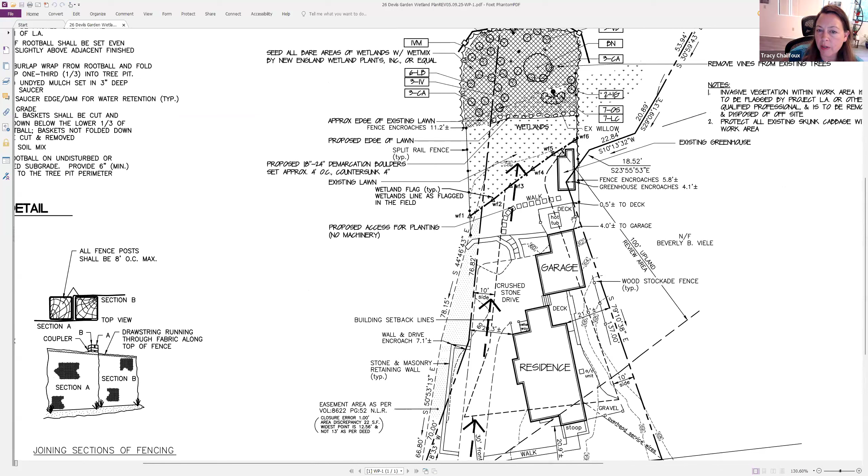Good evening. It is 6:02 on May the 13th, 2025. This is a meeting of the Norwalk Conservation Commission and Inland Wetland Agency.

Could we have a roll call, please, Alexis? You are muted. Mr. Bennett. Here. Mr. Clack. Here. Ms. Brown. Here. Ms. Breslin. Here. Ms. Knight. Here. All right, so you have five, you have a quorum.

Thank you. Is anyone logged in from the public to comment on anything that's not on our agenda tonight? I currently have no attendees. Lovely. Moving on to receipt and discussion. First up is

S25-654, 26 Devil's Garden. All right, so this is a corrective action application that is responsive to an enforcement order that you had issued earlier this year. Again, the activities include restoration of a disturbed wetland area and the after-the-fact construction of some structures within the upland review area of the wetland.

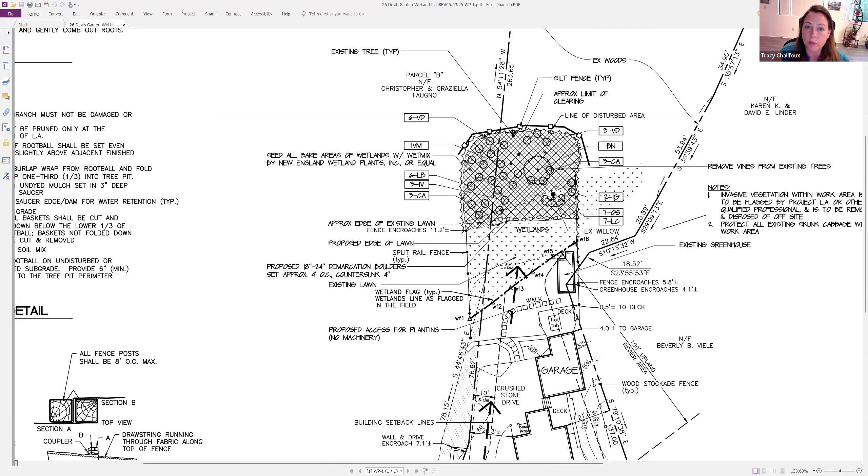And so at this point, I'd like to turn it over to Steve Danzer, who's present, to discuss what his recommendations are. Good evening to the commission. Steve Danzer, soil scientist, wetland scientist, office in Stamford. Actually, I'm going to hand this over to Tracy Chalifoux, landscape architect, because she did the brunt of the design, and I will pipe in if questions arise relating to wetland conditions existing and proposed. Tracy?

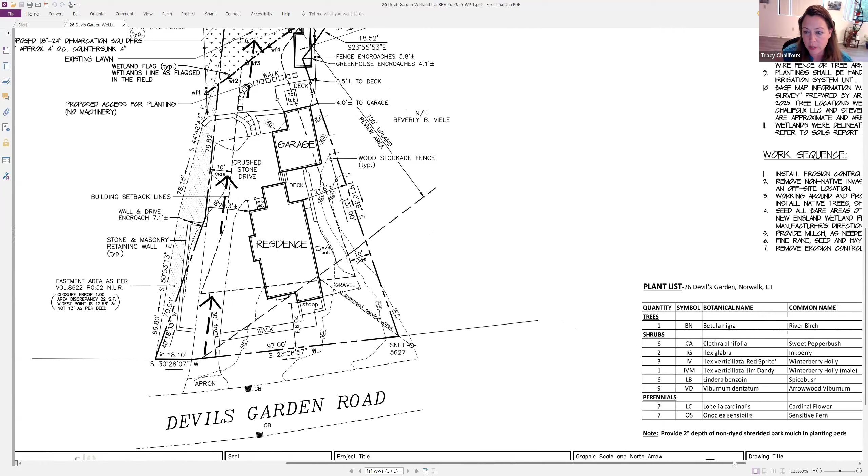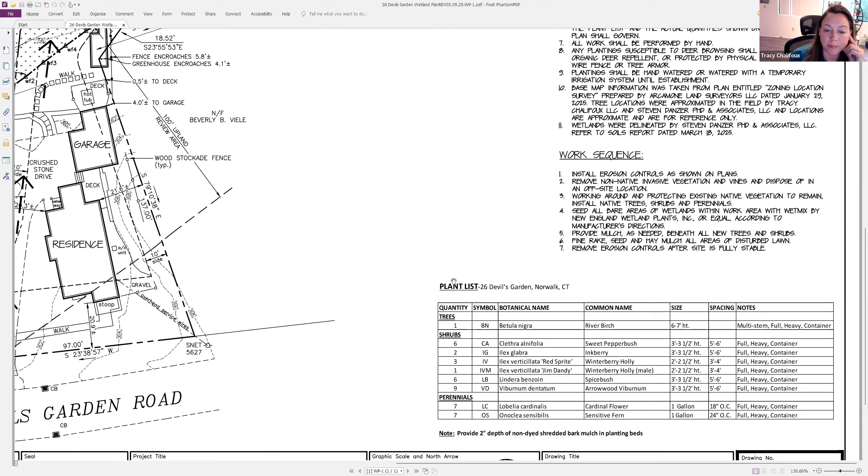Steve. I'm Tracy Chalifoux. I'm a landscape architect based in Danbury, Connecticut. And if I might share my screen with the commission, I'll do that now. Thank you. All right, is that visible to everyone? It is. Yes. Wonderful. It's maybe a little small, but I'll zoom in a bit here.

Okay, here we go. So just to orient everyone, here's Devil's Garden Road. Here is the residence. Behind the residence is an existing garage, and there's an existing shed here, and an existing deck with a hot tub sitting on a platform. I'm going to present the wetland restoration plan. This is to restore the area that was cleared, and some wood chips were spread within this area. The depth varies from about 0 to 6 inches, and that disturbance occurred generally about here, where you see this cross hatching. So it is quite a wet area.

So this planting plan incorporates native wetland plants that are tolerant of varying conditions from wet to some dry. There's an existing willow tree approximately here. So under the willow tree, given the shallow root system, we have some native perennials proposed there. And then some native shrubs indicated by these circles. So these are throughout, to restore the entire area. Any dots that you see are the approximate location of existing trees.

And we did observe some vines growing on those trees. So as part of this plan, we would remove or cut those vines as high as possible in the canopy and discard that from site. And any other invasive vegetation would also be pulled with the roots and discarded from the site.

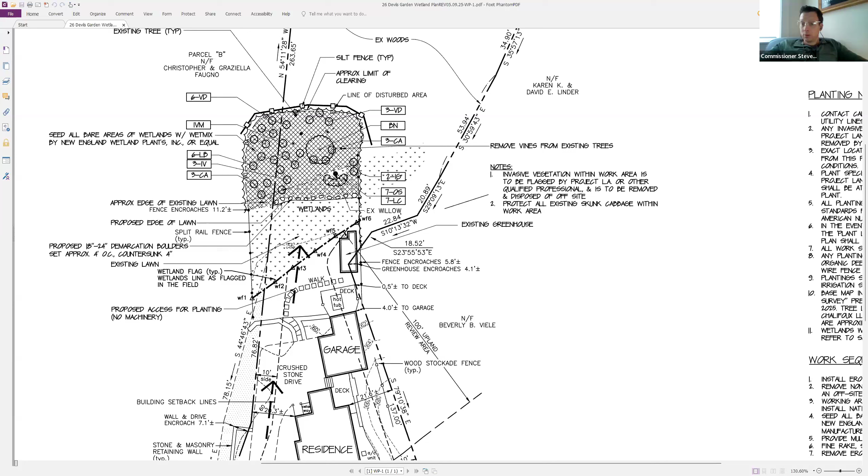Properties change hands all the time. And so, in terms of enforcement, it's about when things are noticed and they come before the commission. So to the extent that lawn was put in, it should have been permitted and it should have come before the commission. Right. Alexis, is there any precedent that we can refer to for a situation like this? And you're muted.

The activities that this is responsive to are the activities listed in the order, and so that order did not look at whenever the historic lawn area to the immediate rear of the house was established. Okay.

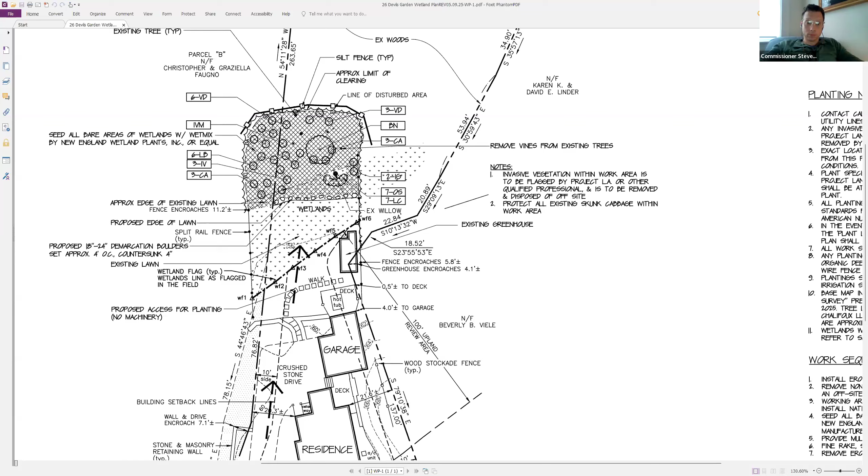I don't have the GIS open currently, but my recollection during the enforcement process was that there was a pretty clear demarcation of lawn going as far back as aerial photos could be interpreted. Oh, sorry.

Additionally, section 4 of the regulations does provide for continued maintenance. There are certain as of right activities spelled out in the Wetland Act, specifically for single family residences, that have to do with continued maintenance. You can't change the natural and indigenous character of the land, but if you have lawn, for example, that lawn can continue to be mowed.

But circling back to Ms. Knight's point, what you have here is a corrective action application, and the order clearly does require that the recently impacted wetland area be restored. So that is very clear. The disturbance of that wetland was done without a permit and is now being considered with this corrective action permit.

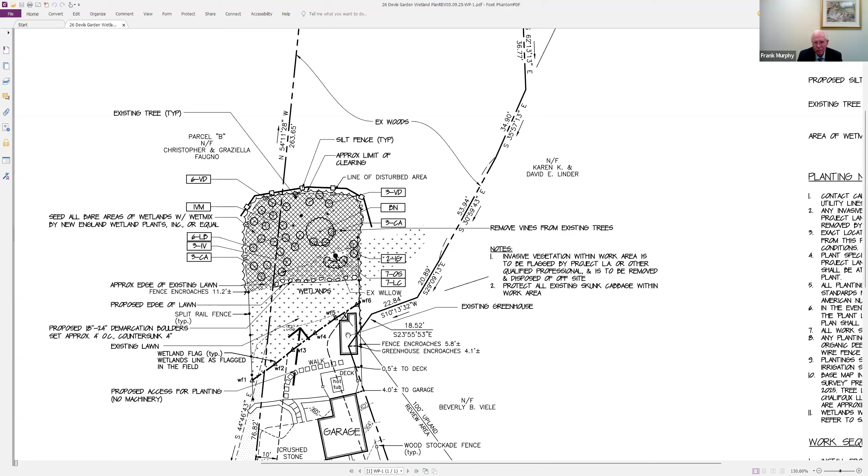So the piece of information I would want confirmed is, does that line of the approximate edge of existing lawn with the line of the boulders and small boulders, the line between the darker hatch and the lighter hatch, align with where we think, based on the aerial photographs, the line was and or should be kept or drawn?

Tracy. Thank you. I just wanted to state that Alexis was kind enough to share an aerial photograph with dimensions with us last week. Awesome. She had offsets from the existing structures, so the plan was revised so that this line coincides with those dimensions, which were the dimensions to the edge of existing lawn pulled from the satellite images before this disturbance occurred. Awesome. Thank you.

I'd also like to point out that there was a little bit of an encroachment back to here. If you can see this very lightly dashed line, we then pulled the restoration further to the east to give more wetland restoration per Alexis's direction. All right. Thank you for that clarification.

Okay, then to move this along, we haven't really talked about the structures within the upland review area.

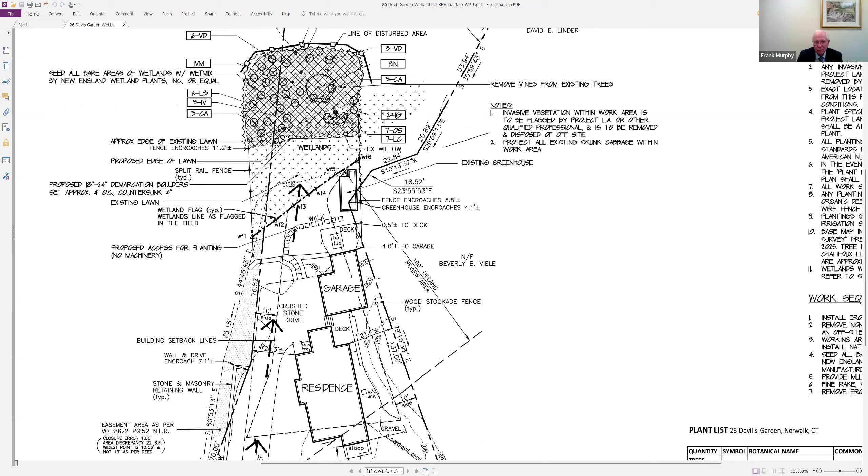And I'd like to remind the commission, as Alexis pointed out, your own regulations refer to residential uses in paragraph 4, and what it refers to is the state statute under which you operate that says in section 22a-40(a)(4), quote, uses incidental to the enjoyment and maintenance of residential property. It also says, quote, such incidental uses shall include maintenance of existing structures and landscaping, unquote.

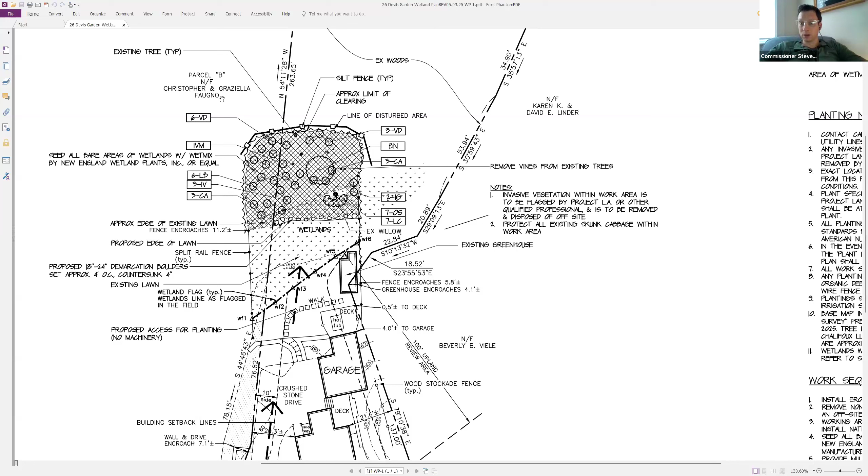So the intent of the legislature, and the legislative history bears this out, was that there were a couple of things the legislature was mindful of when they passed the statute in 1972, one of which was protecting pre-existing residential uses. So we are asking that we be able to keep the lawn because it's been there for so long, and it does absolutely no harm to the wetlands. Mr. Murphy, could you address the structure specifically? Yeah, I will. I just wanted to finish my thought on it. Oh, sorry. But this is on the outer fringe of the land trust wetland, which is 6 acres, and its potential impact is absolutely minimal.

Now, in terms of the shed, the shed is like a potting shed. There was a raised garden there, and the shed was added around it. One of the previous owners had planted grapevines there, and apparently they made their own wine in their basement. But the shed is very small in size. It's approximately 16 feet long and 10 feet wide, and in there is just an area for potting of plants and maintaining of it, and there's some tools stored in there. Once again, it really has no impact on the wetland at all, and we would ask that we be able to maintain the shed as it presently exists.

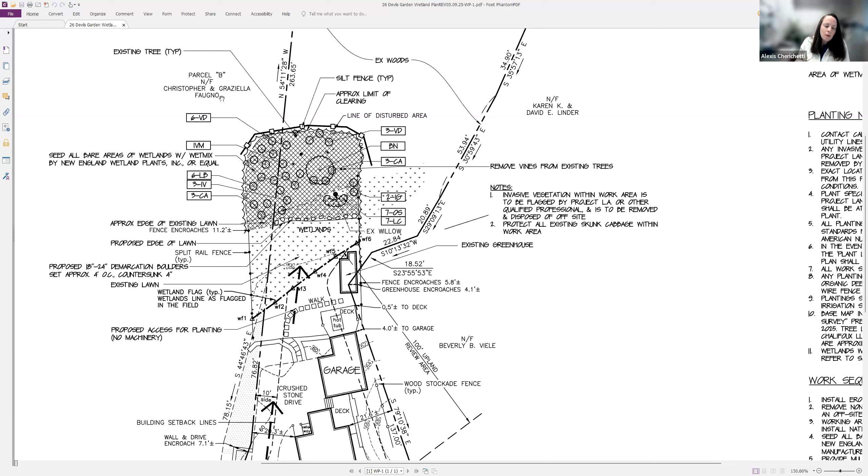Thank you. Any commissioners? I just want to get it out now so that it doesn't sneak up on us later if anybody has any hesitation. I don't. Yeah, it doesn't bother me. I do want to just note that both the deck and the shed are not zoning compliant. So they will need to comply with zoning regulations. It's not just the wetland regulations that need to be complied with. So just keep that in mind, though at the end of the day, the wetland agency may determine that those structures don't have an impact on the wetland.

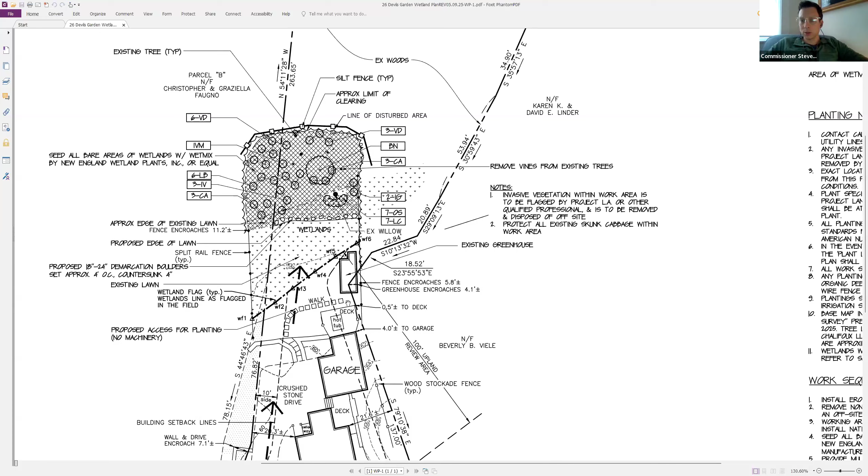Zoning is going to have to follow up, and would not be able to issue a zoning permit for those structures, either crossing the property line or within the zoning setbacks. Zoning setbacks with the new regulations have been reduced for most zones. So it's not a big setback, but I believe both of those are within that setback. Okay. And so if zoning requires you to move them, then you'd have to return to the wetland agency to modify the permit. And that's part of why I wanted to point that out, because I don't really want to have the applicant return to the wetland agency if zoning requires the relocation of those structures.

I'd like to comment on that very briefly. First, we have not reviewed this with zoning, and it's a question of which comes first. Now, if you say from a wetlands perspective it's not going to be approved, then there's no sense in us making an application if we need to go to the Zoning Board of Appeals. There is a slight encroachment on the abutting property to the east.

That abutting owner is well aware of it and has reviewed the wetland plan that we have proposed and has signed a consent to it. Similarly, on the western border, where there is an encroachment, where there will be planting, we have reviewed the plans with that property owner, who has, in part, the land to the west is subject to an easement that's been in existence since the original subdivision and is in the deeds to both the Shaak property and the Faugno property

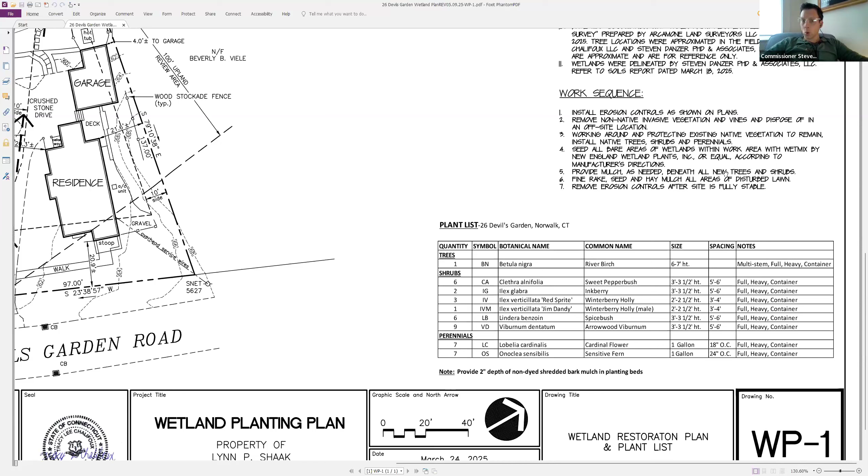to the west. In terms of the area where there's additional planting, so in the area of the Faugno property, Mr. and Mrs. Faugno have also signed a consent to that work and are well aware of any encroachments. So I don't think that those items should be an issue at all. Right. So the civil part of that is not a municipal concern, and zoning, for instance, would not get involved at all with the plantings on 26 Devil's Garden.

But for the shed and deck, those are considered new construction and new structures, and those would require a zoning permit. And even though the abutting neighbor may not have an issue, if they're not compliant with the zoning regulations, they could not be permitted. Can I ask a quick question, time-wise? And Catherine, I know you've got your hand up, but we're just receiving this. We've got time.

Is it possible to let this sit until the applicant has a chance to get things squared away with zoning, or at least get a rough idea of what they're going to require? Absolutely. Yeah, you have 65 days without an extension from the applicant. You have 65 days before you either render a decision, or if you make the determination that this is significant regulated activity, to start the public hearing.

Okay, so I don't think there's anything dire happening right now with regard to erosion or harming the wetland beyond what's happening at a very, very passive level. So maybe that's something the client would consider, is to leave the wetland application open long enough to get a read from zoning as to what they may require, and then maybe change the application to the wetland or to Conservation Commission accordingly. Does that make sense to you guys?

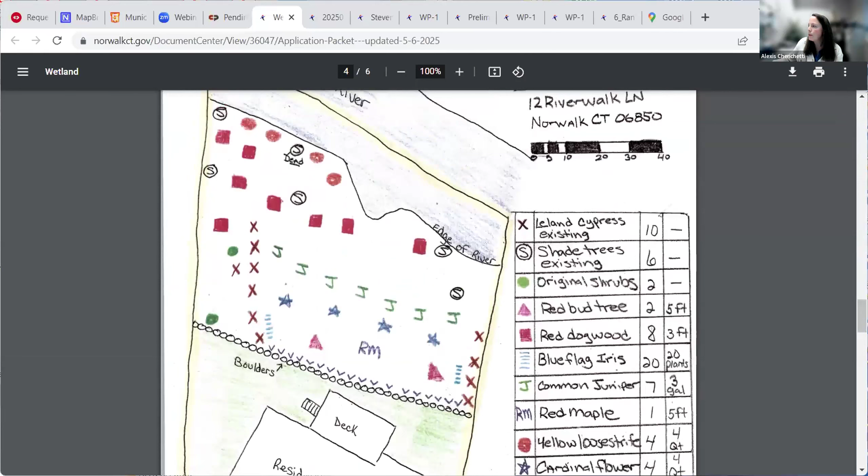And if it sounds like they're gonna make you move the shed, then you can just update these plans accordingly. Or change its shape or whatever. And that way, like Alexis said, we don't have to do this twice. And that would save everybody time and hassle and probably save you some money. Well, I've spent a lot of money so far, so. Yeah, sorry. Catherine, thank you for being patient.

Yeah, I think just one of the things to flag that is a concern is looking at the shed and the proximity of the wetland line, to think about in the plans the water runoff and filtration. So it'd be really great to see a bit of buffer filtration planting to help. Typically we've asked for that in other applications. Lynn, is there a door out the back of the greenhouse? No, the door is just at the front toward the deck.

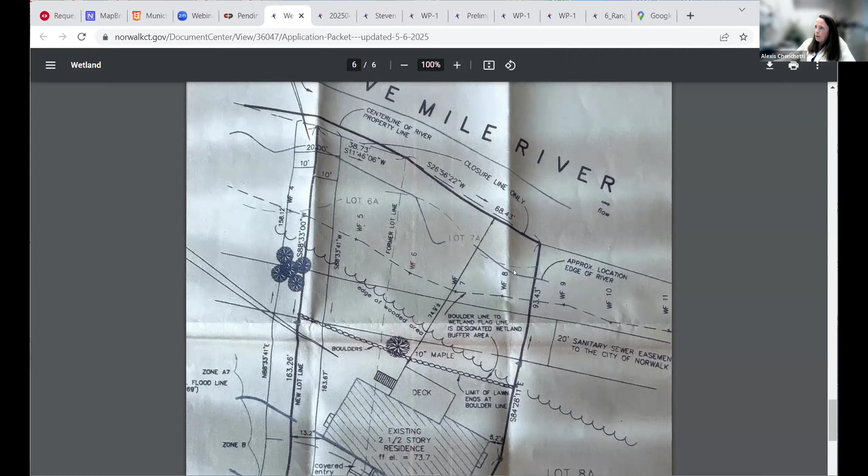Yeah. Okay. And are there any downspouts or gutters on the greenhouse? I wouldn't call it a greenhouse, excuse me. No, never mind. You answered my question. Thank you. It's just a plastic covering wired to keep the animals out. That was a vegetable garden. Got it. Okay. It's also a level area, so I don't think there's any appreciable runoff from the shed. Right. So I just have one more and then I think we can move on.

Alexis, are we happy with the proposed sizes of the trees and shrubs? So typically, not always, but you frequently require that shrubs be closer to a 3-foot minimum at the time of planting. We've just found that, especially with a seed mix, the lower shrubs have a little bit of difficulty competing with the herbaceous cover.

But it's really just the two Ilex varieties. The Jim Dandy and the Red Sprite cultivars are a little bit more compact. So that would kind of be up to you. So instead of a 2 to 2.5 foot height, what would we shoot for? So you often require a 36-inch height at the time of planting. Tracy, is that a big ask?

No, not a big ask. We just might have to do not a species change, but a cultivar change, because as Alexis mentioned, these tend to be compact. But if we're worried about them getting lost within the seed mix as it grows, we could just change to a different cultivar that is more sizable. Okay. So maybe that's just something to consider next time something gets submitted to us, hopefully after we've learned a little bit from the zoning department.

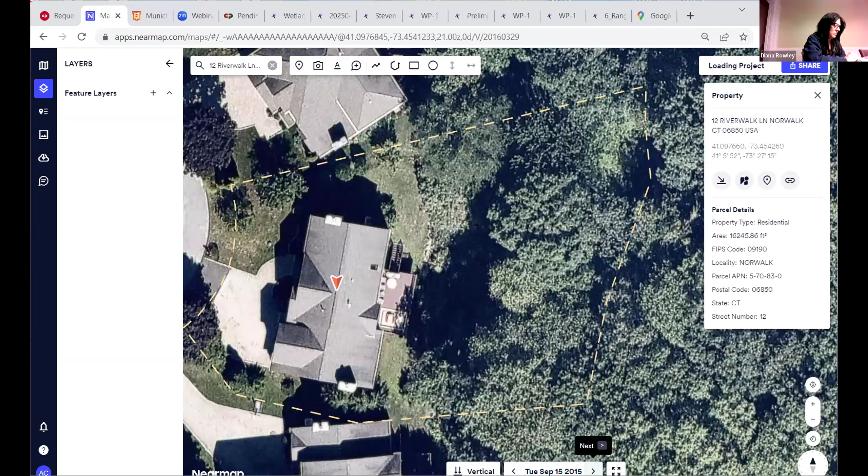So I have removed, like in January, dead trees that were kind of safe to remove without harming the river. We left that one because it is slanted over the river, and we were afraid of it going in the water. It's totally dead. It's probably going to come down. I'm surprised it hasn't come down in the wind yet. You can clearly see it's not healthy. It looks hollow.

But the other one we took down was hollow, but was more facing the property, so it came down on the property, not in the river, and that's why we left that one. So I didn't want to take any more trees. We could clearly see that they're dead, but I was waiting for it to fall and then figure out what the next plan is. So you tell me. Do you want it down?

Let's put a pin in that, and I apologize for jumping in on you. But I think that was the extent of the landscape plan, right? What you just explained to us? Yes. Okay. Is there anything else you'd like to add before I let one of the commissioners ask a question? I don't think so. Okay, this is super helpful, by the way, the diagram and what you've done. So thank you very much. Ms. Breslin. Thanks, Alexis. This is helpful.

I am not certain, and I wanted to ask the other commissioners about the junipers and the redbuds. To my knowledge, neither of those are really moist soil trees and shrubs. I could be wrong, but I wouldn't want you to plant something that is just gonna die. So I just want to make sure, check with the others before.

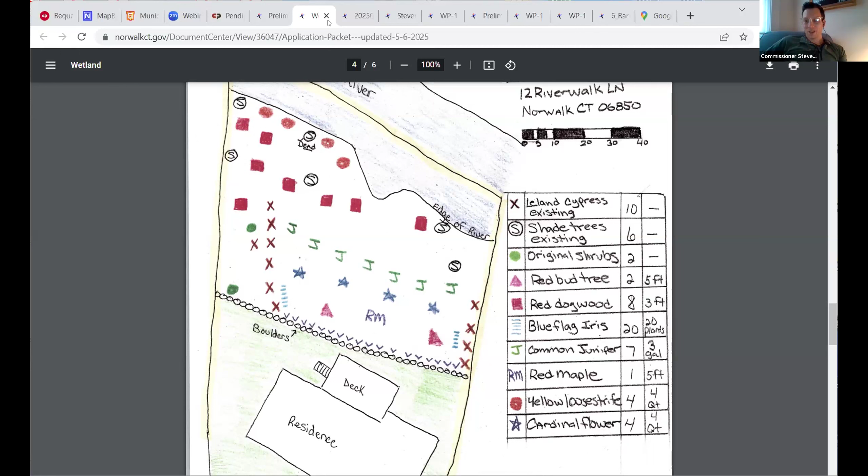So based on the comments that I've heard the commissioners make so far, I'd recommend that you give me a call later this week, or you can come in, maybe make some tweaks to the proposed planting plan. We can talk about the pros and cons of various stuff and get you closer to all positive comments from the agency. So no decision will be made.

They can't tonight, so they're not allowed to make any decision tonight, statutorily. I know we had the two weeks that you said. Yep. So we talked also about that I moved. I have surgery planned, which was supposed to be today. I moved it back into July so I can get this plan done. So I'm hoping for a sooner response, being that it's planting season now, and after that July date, I won't be able to do anything. So I'll put that out there.

I think we're not far off, right, Alexis? I mean, like you said, there's some tweaks that need to happen between now and the 27th, which will be our next meeting. But I don't see any reason why Alexis couldn't have a draft memorandum ready to go by then, so that when we review what's been updated, we can also hopefully approve it.

Quite honestly, do you want to plant these in June anyway? Yeah, but she needs time to get it done before the surgery and stuff. Well, I'm saying if it's after, you could do it in the fall, is my point. Diana, usually Alexis writes in, you've got six months to do this, or three months once you've started; there's language in there. I think we just put it however works best for you, because there's not any major timely implication here. So I think we can just work with that, right, Alexis?

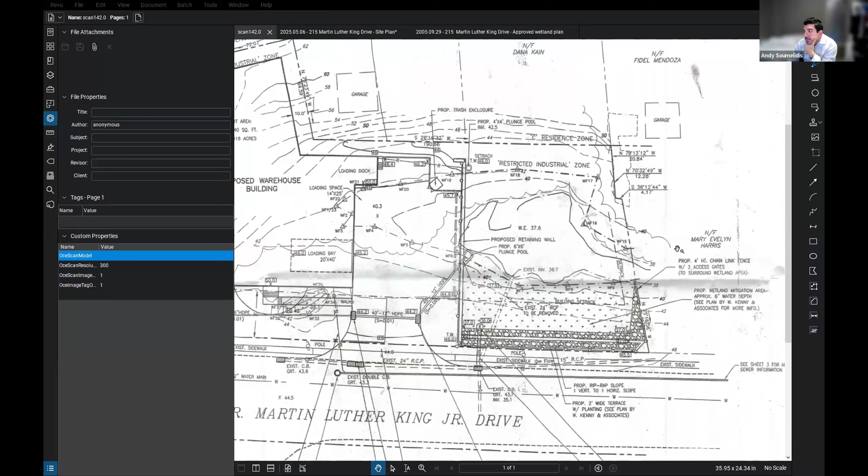Okay. Diana, you've got an excellent resource at your fingertips. Alexis has been very helpful and dedicated a lot of time when we go down there, to make it an easier process. I do appreciate that.

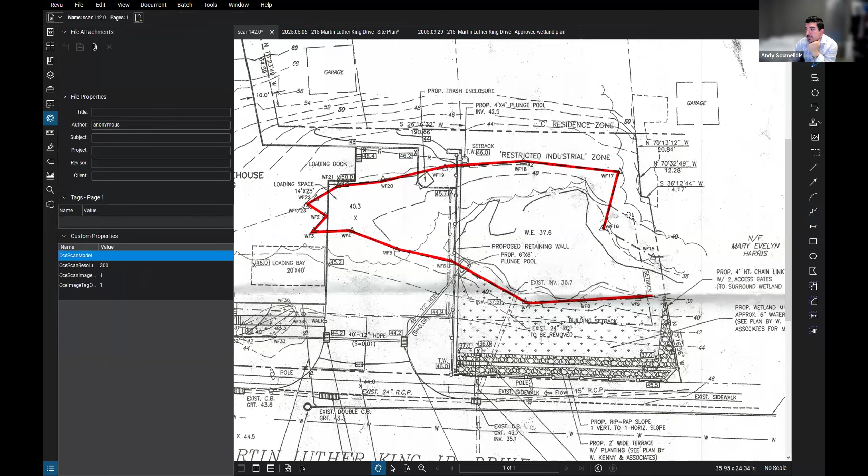The big trees I worry about. I don't want to be planting trees and then having to take them down, or that they fall. So I would plant them far away from the house where it's not going to do damage. And then the water is probably going to rot them. The water gets five feet high down there. Well, I don't think there's anything we can really do about that, unfortunately. But I think you're on the right track with maybe a little bit bigger and a little farther back, to get more of the restoration of the canopy that was there at one time. Alexis will help you out. How many trees are we talking? Three or so, just a couple to replace a couple of the junipers, maybe.

Another thing, Diana, the deer love the evergreens. Deciduous trees they don't really bother too much, once they can't nibble them. And planting the smaller trees, 1.5 inch caliper, it's going to be a very long time before it becomes a danger tree to your house. We'll all be gone. We're talking 30, 40 years, just to be honest. Also something to keep in mind.

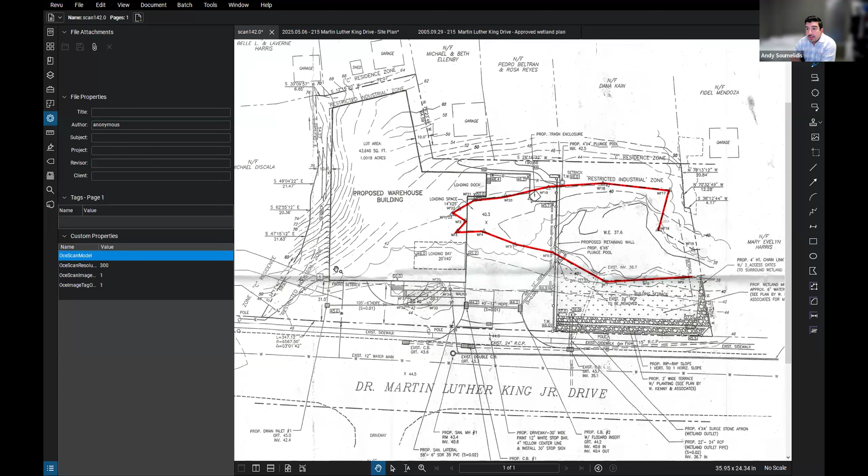Moving on to 215 Dr. Martin Luther King Jr. Drive. So, S05? S05, yes. Big trees. In the Wayback Machine. So this is a 2005 permit was issued.

2000. Oh, hang on a second. Diana, can you still hear us? I'm gonna mute her. Okay, yes. Sorry, we're muting you. You're good. We're moving on, so never mind. Okay.

2005 permit issued for the development of a lot with a warehouse, and the 2005 permit included removal, destruction of a portion of a wetland, and in return, wetland creation at another part of the site. Sometime it was transferred from the original permit owner to a new owner, and then there was an extension application, but that ended up being withdrawn.

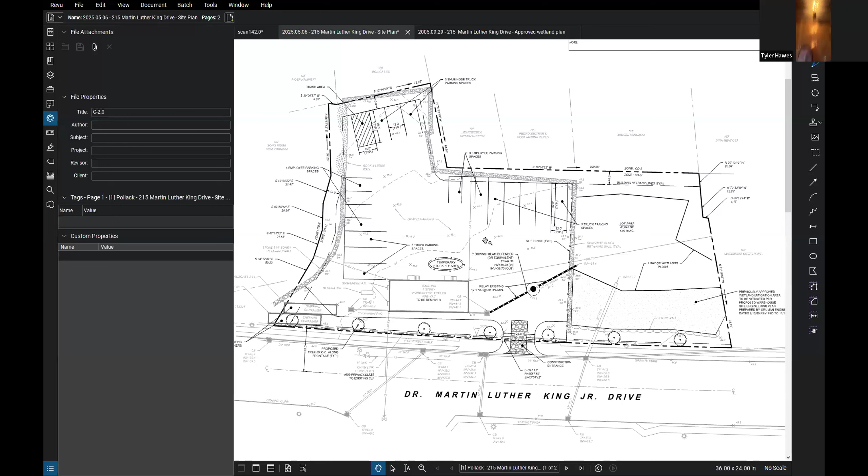On the pending application webpage is all of the information that the applicant has submitted. And then there is also the most recent permit, which was the 2006 transfer of the permit. Within that permit, you can see all of the conditions of the original permit. I see that Mr. Soumelidis from Land Tech is here, presumably for this application, so I will turn it over to him to give a brief overview of the purpose of this application.

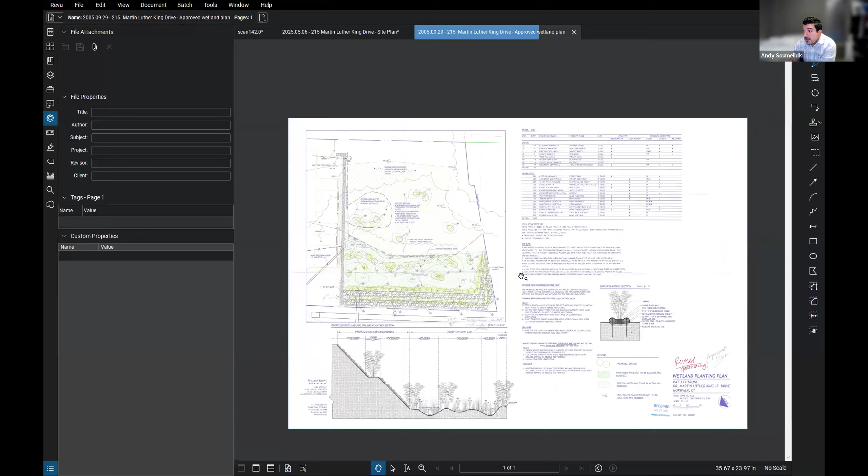Good evening. My name is Andy Soumelidis. I'm a principal at Land Tech. I'll just take you back in time a little bit and share some plans. We weren't involved at that time either. We've been involved since then, looking at other proposals for this site. So here is the 2005 approved plan. This is Martin Luther King Drive here. Here are the limits of the property. At that time, there was a proposed warehouse that was approved for this site.

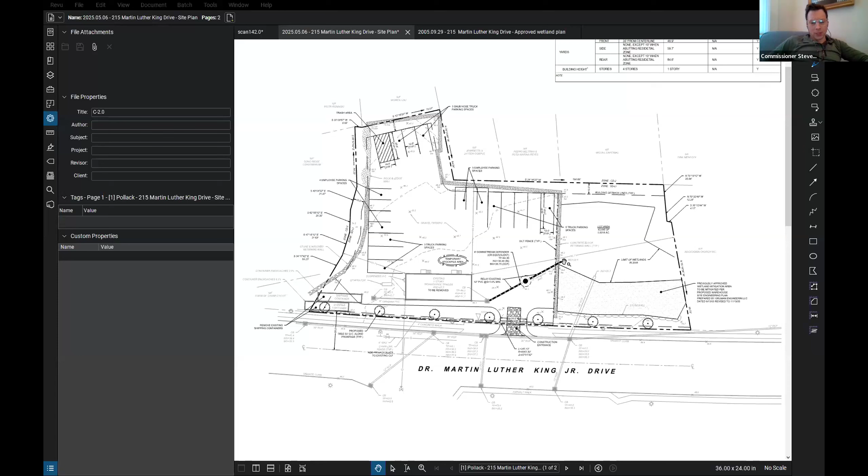Zooming in here, if you've been to the site, there's a retaining wall here now that was built as part of this approval. I'll just quickly run through here. You'll see I'm outlining where the existing wetlands were at that time. This portion of wetlands was actually filled in, and this portion here was a new wetland creation. So that's what we're looking to finalize, or complete. There was a bond posted for this work that I think the city still holds.

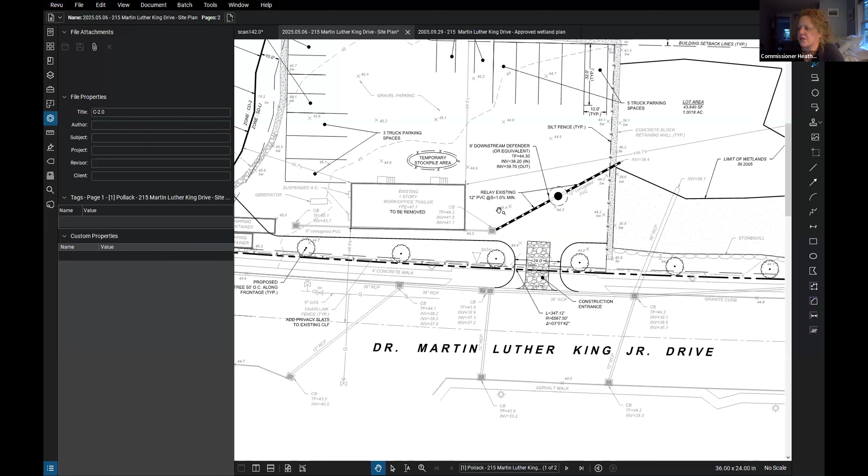As part of this application, we are looking to basically legalize a use that's going on right now. I'll show you quickly what the drainage infrastructure was. There were some catch basins to be installed on this property that discharged right into the wetland, essentially, and the wetland functioned as a stormwater wetland. There's also runoff from Martin Luther King Drive. There are various catch basins that connect and go into that wetland today. So that's taking road runoff and runoff from this property.

There were walls constructed. I'm sure many of you have driven by this site. There are some large retaining walls, and basically this site was leveled out, and it's essentially a gravel parking lot today that's almost overgrown. So what we're looking to do today is, again, that drainage infrastructure I mentioned earlier, some of that was installed and discharges into here. There's also this pipe that discharges runoff from the road.

What we're calling out is basically for this work of that stormwater wetland creation to be completed. Looks like some of it may have been done, but we'll work with staff and our environmental team to make sure that's been established, that what needs to be planted is planted there, and any invasives that may have come up are removed and replanted with what's supposed to be there.

What's currently on the site is this office trailer. Who owns the site now is Two Men and a Truck, which is a moving company. What they've set up is basically a temporary mobile office on a trailer there, and they occupy the site with storage of their commercial vans and vehicles.

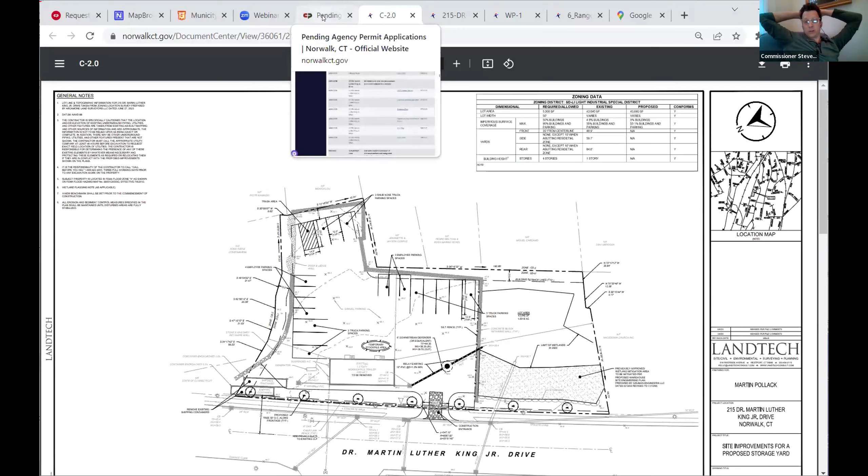So what we're looking to do is essentially legalize that use of a commercial vehicle parking lot, call it, to house those vehicles. We will be removing this trailer since it's not allowed per the zoning regulations, and then just occupy this site as it basically currently stands today as a gravel lot, and legalizing the use essentially. So no real earth moving is taking place.

On this pipe that discharges into the wetland, what we're looking to do is install a hydrodynamic separator. That is basically a manhole structure that has a swirl chamber in it that takes out sediments and fines, and also takes out oils. So it's a proprietary stormwater BMP, best management practice, to be installed on that outlet pipe.

There is no opportunity here really to do any infiltration on this site, and that's probably what was the impetus behind this original design as well. There were previous contaminants on the site potentially. It seemed like the site was capped with some type of liner. When we went to dig test holes, we hit that liner and put it back into place. So this is kind of like a capped site from an environmental perspective. And what we're looking to do now is essentially legalize this use that the current owner is occupying.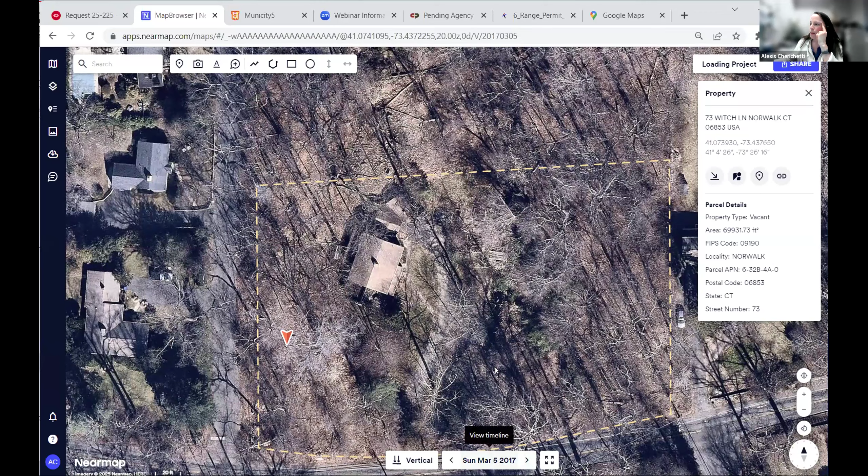Do you know the extent of the capping of the site? Does it go pretty much up to that concrete block wall right there? I would imagine. I don't know all the history on that. Okay. Is there any plan to do anything with the retaining walls on the side? I'm looking at a Google map. Well, why don't we maybe have Alexis share a street view or aerial view, so we're all looking at the same thing. It just looks like it's falling apart.

Yeah, so it's a concrete block wall. This is a 2017 aerial. So this is the constructed wall right here. This is where the filled wetland was. But the other side, you're talking about all these? Yeah. Well, that's way more than 100 feet away from the wetland line, or maybe not. 100 feet is about here. Which wetland, the one that was there before? No, the current wetland. Ah, okay.

Just curious whether they're resurfacing or redoing the surface, and if any of that impedes on the review, the buffer, whatever it is. It just looks like there...

Potentially there is work to be done. Well, and the calculation for the site water runoff, Andy, I assume hasn't changed. There's probably no infiltration assumed. And the pipes that are in the ground and the separator that's now being proposed is sized according to whatever the anticipated flow is. Okay.

Basically what's there. We're not proposing any new impervious. If anything, I think we're reducing it a little bit with our proposal, actually. It is a gravel lot, and we're basically taking the impervious surfaces that are on the site and treating them. Okay. So it's not going to change anything.

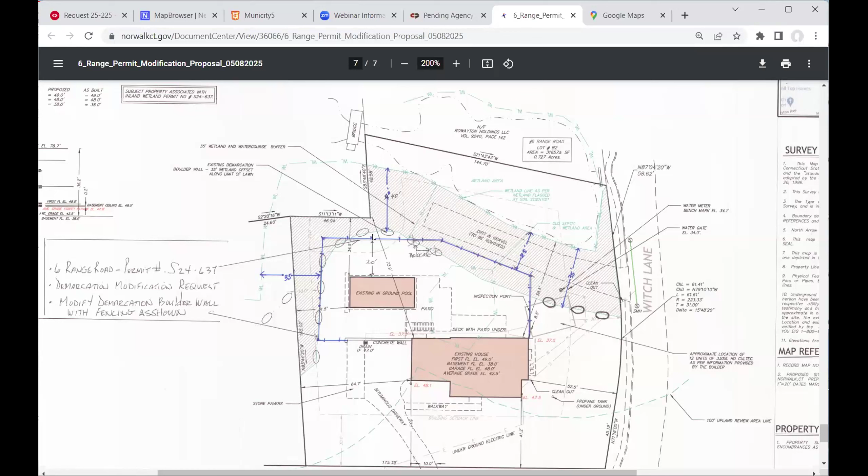So as part of this application, I would definitely encourage you to look at Mr. Kinney's original design, look at what's out there, and propose something that gets it closer to what was intended. Right. We would plan to do the Bill Kinney design, but we can have that discussion. Yeah, Bill came up with a nice design. That's why we kind of left it the same.

Yep. Okay. So it seems like they did some of the work, right? They obviously built the wall, they excavated it out, but I don't think they planted it right, so. Okay. Mhm. All right.

Let's see. I had received this application relatively recently, so I haven't done a preliminary review letter, but I will finish that up this week, and then we can talk about just the mechanics of transferring the permit and that kind of stuff. Great. Okay. Well, I don't see any commissioners raising hands, so I think we have received this. I think we understand mostly what's happening, and there's more work to do, but we will touch base again in 2 weeks.

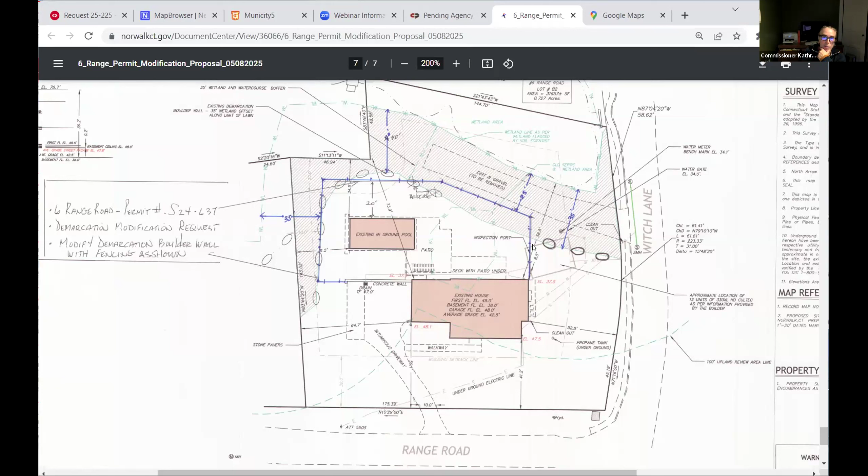So what was approved for this lot was a demarcation wall and a proposed restoration of areas to the east of that demarcation. So removal of the driveway off of Witch and planting and enhancing both the wetland and the wetland buffer. So that's where it is, and I will stop sharing my screen and turn the microphone over to Mr. Hawes. And Mr. Hawes, you're welcome to share your screen, or if you'd like me to share my screen to show your application materials, I can do that as well.

Thank you, Alexis. Can you hear me okay? Yes. If you could share your screen, that would be great. Okay. So thank you, everybody, for the time. I know we're the last on the agenda here, so I'll try to be as expeditious as possible.

My wife and I are the new homeowners over at 6 Range Road. And what we have put together here is a proposal to change the demarcation of the wetland buffer area from boulders to a fence, which is a 4-foot cedar box fence. Additionally, we've proposed to modify the fence layout for the backyard. In general, we want to put the fence in for safety purposes. We have 3 young children and a dog, and would love to be able to fence in the backyard area.

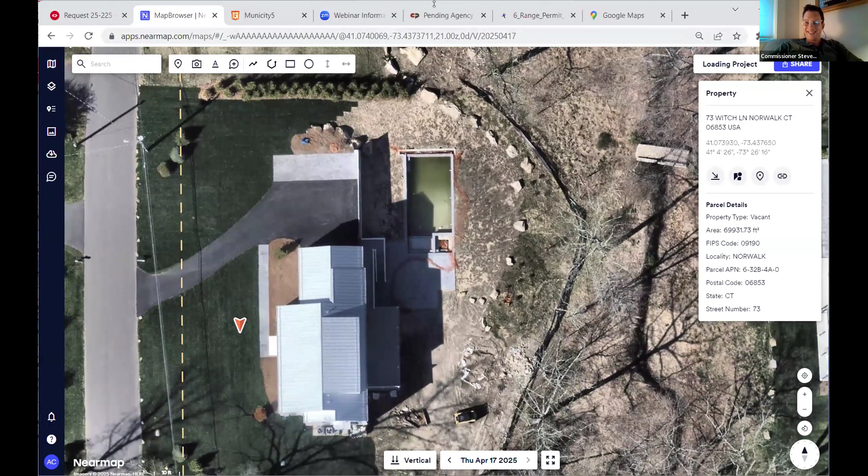To create a bit more functionality and balance within the plan, we are proposing to shift the fence slightly into the buffer area, but no more. There will be no less than 25 feet from the wetland line, which is kind of the standard in the neighboring development with the additional 3 houses. We are going to hand install this, so no machinery. The fence would be no closer than the 25 feet.

The full planting plan will be maintained. Some will be relocated from the right-hand side that you're looking at here over to behind the pool area. But our objective here is to maintain the planting plan in full, but just extending slightly into that buffer area on that right-hand side.

And so on this map, the crosshatched area is the buffer. This is the wetland limit line here. So anything on this side is wetland. And originally at 35 feet was a proposed boulder row. It goes like that. And so instead of a boulder row that followed the limits of the wetland, you're proposing the fence that's shown in blue here. So you'd be having a little bit more of a buffer here, but remove this part and this part. That's exactly correct.

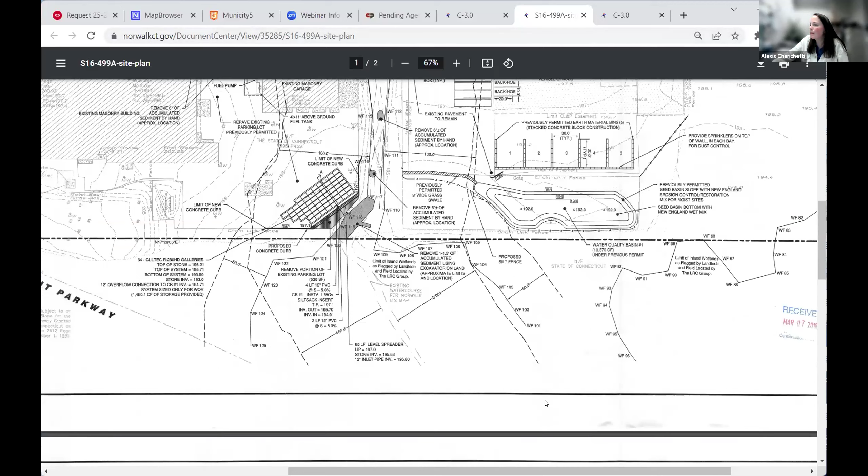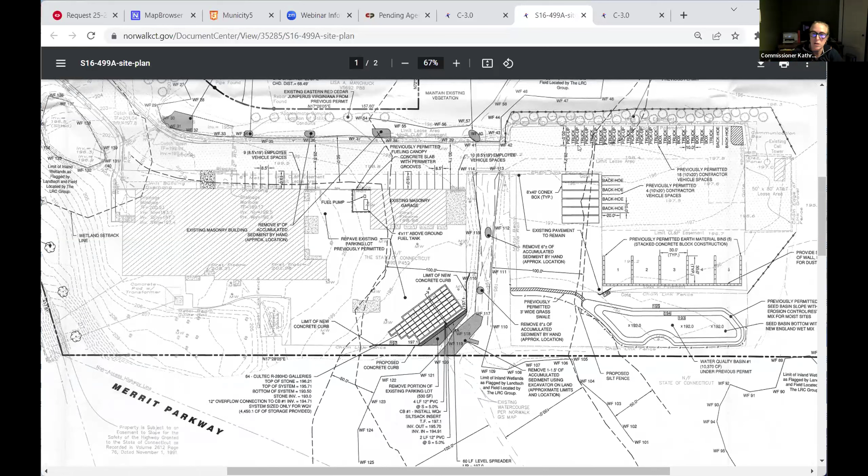And I just wanted to note or put out there for comment that where they're doing the catchment area, if they wanted to do the 2016, then above ground would be a seeded basin slope with some plantings on it and would not be part of the active yard. So in terms of the space or what was approved, we're kind of allowing an expansion of activity over and above what was in the 2016.

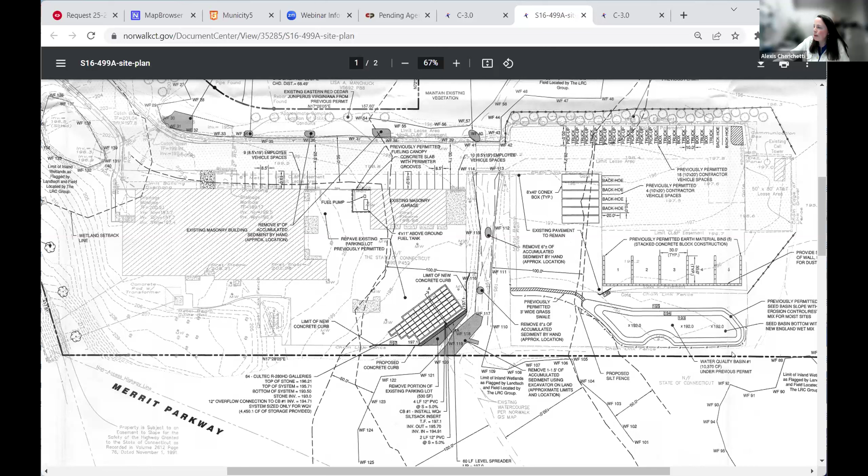If you look at the bottom part below where they had the chain link fence and the proposed bin, they had a seeded area. So if they wanted to do that seeded area over the catchment basin, then I think that would be in line with what was previously approved and correct in what they were saying. If that's what they're asking for, then the top level should be what was in the 2016 plan. And what Brian Carey proposed is that

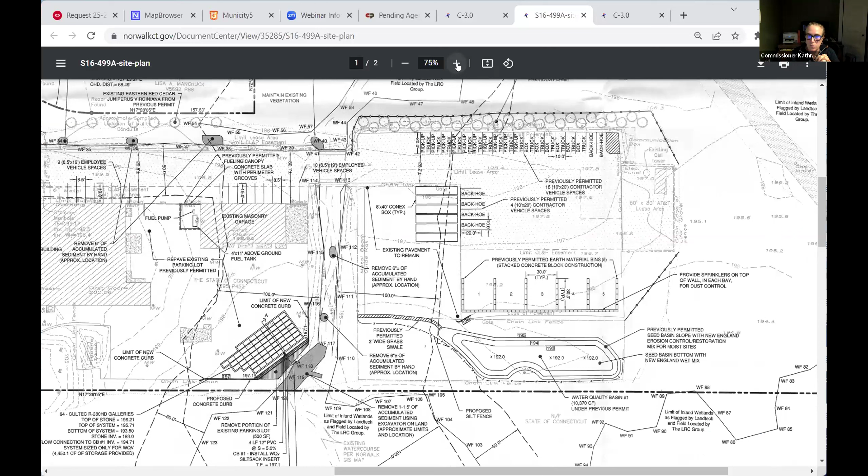the effect, and I'll start by apologizing for this one. I don't think I managed this one very well at all. I think I let my general disgust with the lack of respect to boundaries, whether actual or just on paper, get in the way of me looking at this technically, which is what we're supposed to do. And so it's the function of the wetland that we care about. And I'm just spitting out what's in my head.

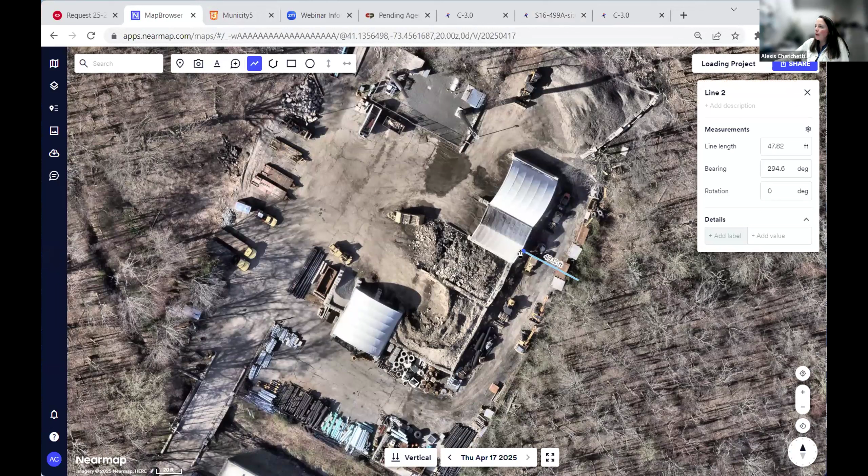And to respond to what you're saying, just to get everything out there, I totally agree that it doesn't feel right to increase the amount of surface area that can be used as a yard. But I have to balance that against the quality of the wetland after looking at the two approaches. And at first I thought a third party review would be needed to prove that. At the end of the last meeting, I sort of became convinced, even though I didn't like the posturing about whether we're improving the yard size or not.

Having the separator, having more control for runoff as what's proposed in the draft memorandum, the draft resolution, may actually end up being an improvement to what was previously approved in 2016.

And the other side of that is, I guess we can pull the plans, but there's the surface retention area or whatever, and then beside that there's like nothing to the left on the plans. And I didn't realize, and Paul had pointed out for me, that that was just basically old pavement that had grass growing up through it, but really wasn't serving any sort of function. And so I had been seeing that previously as naturally behaving landscape, which is actually not true and was poorly illustrated on the drawings. But anyway, that's just where I'm at.

I was exactly where you just started. And I don't know exactly. Yeah, I guess I just explained how I've gotten to where I am now. So does any of that have value to you as far as the function versus the actual perception of how the area is used, is the distinction I'm trying to make? Yeah, I mean, they had like the 3-foot wide grass area that would be kind of a demarcation, and I don't see that on the new plans.

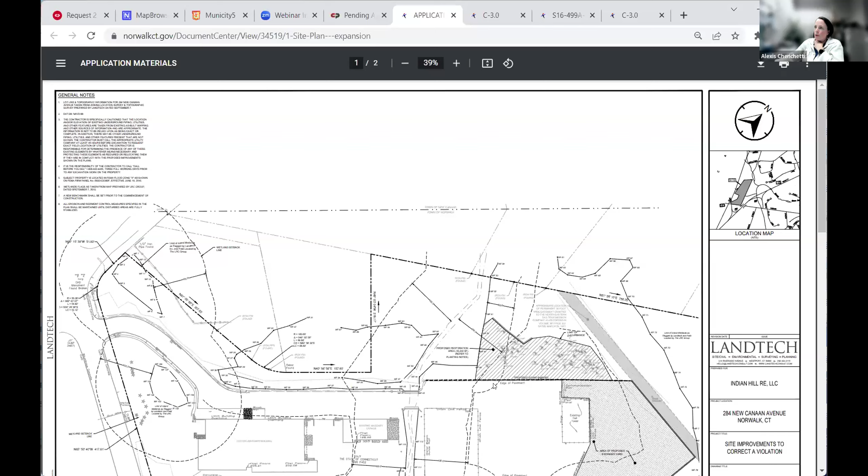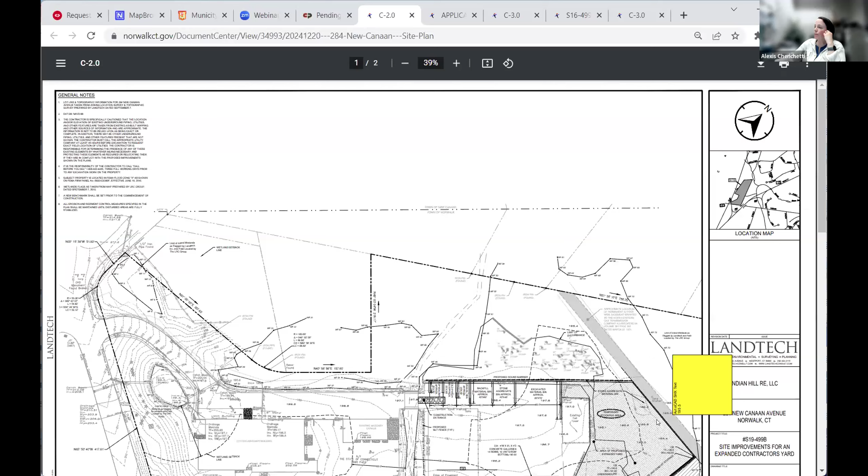Right, and then the bottom left-hand corner is where the swale was supposed to go through and catch all the runoff from everything uphill, which is up on the plans, and direct it down to this catch basin that was supposedly going to fill up, need maintenance, but not get used. So your buffer zone, Catherine, is definitely not being achieved there.

And I guess you could assume that 3-foot wide grass swale, this is what I assumed originally, that to the southeast, down below, that was natural and was to remain as such. Correct. But what would be the point of planting a 3-foot wide grass swale? So you'd be having to drive across the swale every time if you wanted to use that tiny little triangular pie-shaped corner of the lot.

So it didn't have active... It's debatable whether it had active function with regard to the upland or the buffer. I mean, you're not planting things to then drive over it and park. True. Yeah, that's true. But I don't think they were planting. So I think this was an area of contention last time. And I think what we came away with is even if they had left it, there is no planting specified there, at least that I can see, right?

Which we talked about, Paul talked about, is broken concrete, broken asphalt. And so the function of the 3-foot wide swale was to further filter some of the runoff that would then go into the catchment system. So that was not needed. To me, the catchment system seems to be an upgrade from what was originally here. I think it's an upgrade with regard to actively managing surface water. How about that? Yes. Specific.

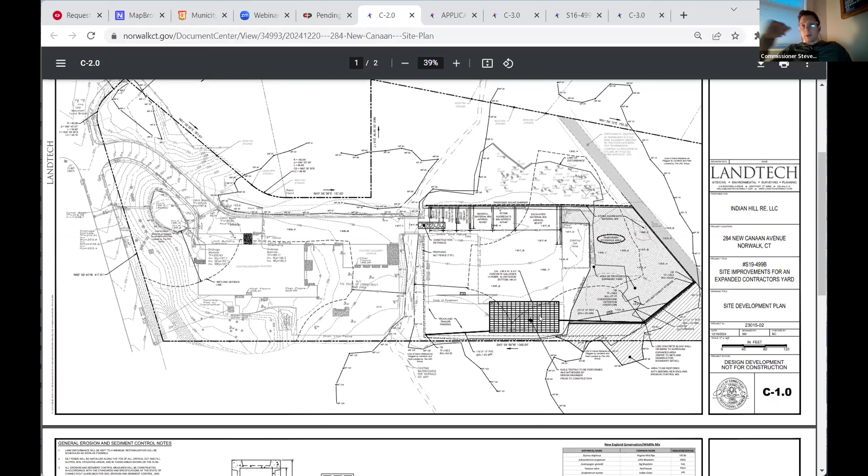Which I think, at this point, the condition of this yard, the condition of the area, should probably be the priority, at least in my opinion. Well, what was proposed was actually a good plan. The basin was a good plan. What was not good, and I'm sorry to talk smack about who came before us, and Alexis is obviously in charge at this point, but there was a bit of an oversight in that southeast bottom corner. Did we just expect them to leave it alone? Did we anticipate them actually trying to operate within bounds, which they've obviously been hesitant to do, to put it nicely? I don't know.

But I guess the reason I'm mad at myself is that we needed to have gotten the third party opinion sooner, because all we have right now is the owner's professional opinion. We don't have another professional opinion to stack against it. And as soon as they appeal this, it's going to be a house of cards. And they're not going to stop. But we did ask for the third party. We did, but Alexis, where does that leave us? They played the game better than we did. They stalled.

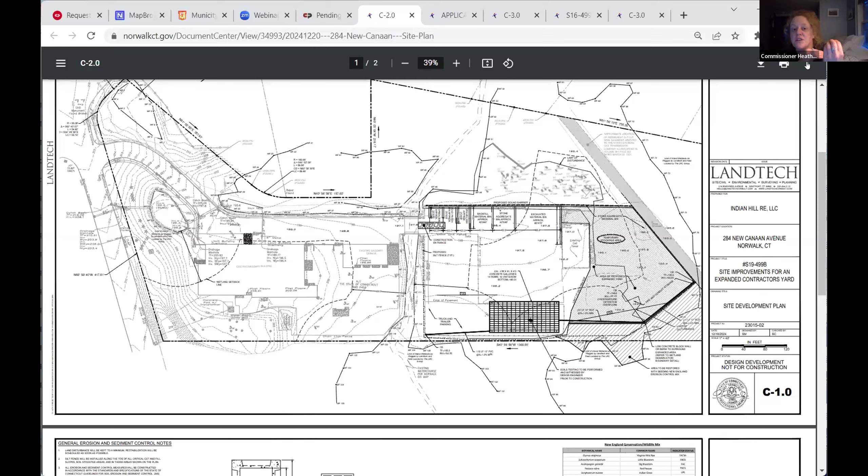So you have a few options. Again, it's a corrective action application where the applicant believes that they are responding to that order, and the order says that they didn't do their stormwater management and that they've cleared and filled this area. So they are removing the expansion here, and then they are proposing to do stormwater, but a different system, directing stormwater in more or less the same place. So two very different designs. One's all above ground using vegetation, and one is below ground using catch basin grates, pipes, mechanical separation, and then underground infiltration.

And so I think it's a matter of, when you initially required a third party review, when you look at their original application, which was this. Well, this isn't the best example, but they proposed a substantial expansion. It's a horrible one. So instead of doing any corrective action for this filled area, they're proposing a substantial expansion of the yard. And that's when you had requested a third party review.

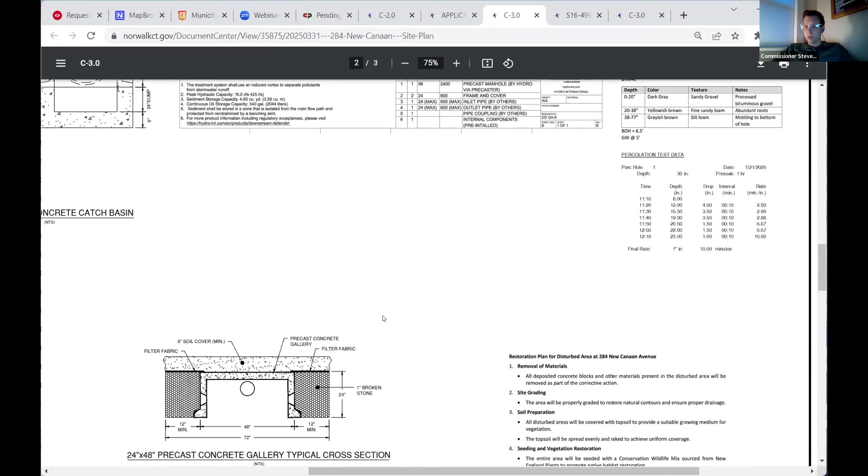I'm just gonna give my opinion one last time on this, just so I'm clear and that we're all clear, which is this resolution has to do with restoration of the unapproved extension areas, plural, right? Because there's that side, and then there was also behind, I believe, by the berm. Well, that's separate. Oh, right. Okay, sorry. So just that area, okay.

And everything else, as far as we've been told, has reverted back to the 2016 already approved plan, which means that it is approved for them to do everything within that plan already. And so the change to that would be the above ground versus underground catchment system, and that swale, to your point, the swale in the bottom left corner, which is undetermined future anyway. Question mark. Yeah, and so if I understand correctly, that is the only thing in our purview at this moment under this current enforcement.

And so my last thought on that is, I'm much more concerned about the area that was taken over that needs to go back to how it was. That's a large chunk that was eaten into. As far as my opinion, which is not based in much else at this moment, so take it for what it is, the underground catchment system is purportedly more effective than the above ground, and I'm more concerned about all the runoff in that lot, in all of that impenetrable surface, than I am about a few feet of green space. Exactly. That is going to be, in my opinion, negligible. I keep saying in my opinion because I may be wrong.

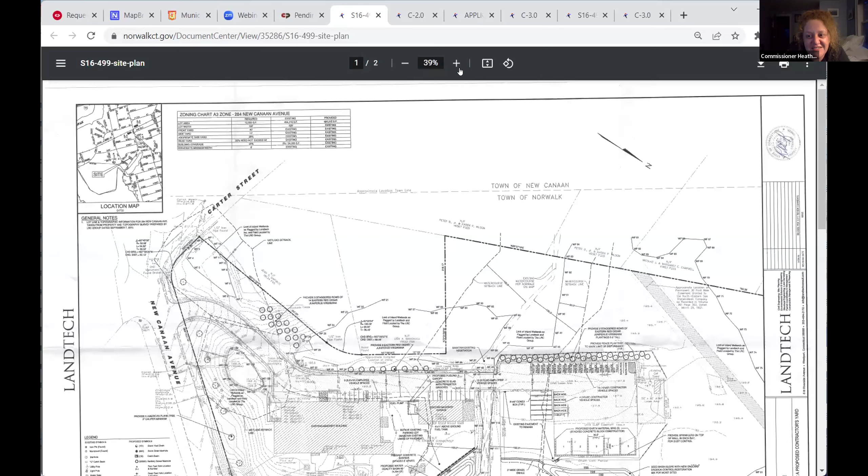Right. So you have some options. I'm looking for their little detail. They had proposed on the northern end of their yard a 3-foot high, 2 concrete blocks with this earthen berm to kind of give it a hard line, but then a buffer inside. I don't know if that's palatable. I guess it depends on how much of a buffer you're looking at.

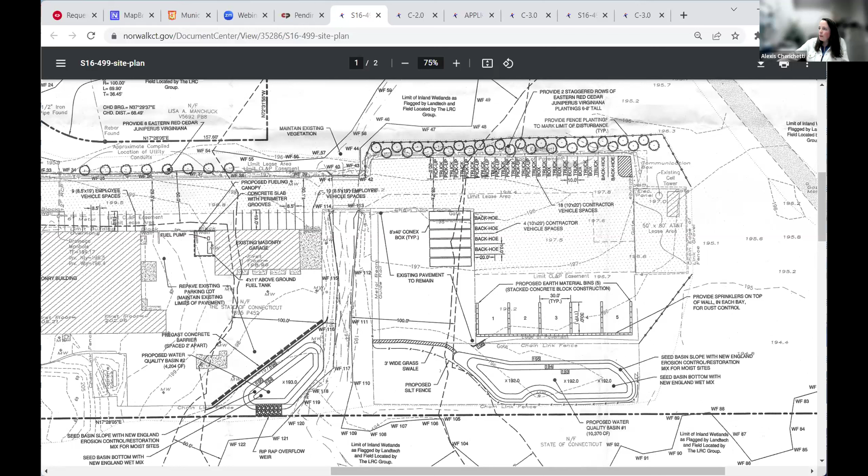So you've got this existing chain link fence. I think you can require that the perimeter have, I don't know, 2 blocks or 3 blocks or 4 blocks and a related berm on the inside. I don't know.

Well, but that's not the same. It's just not the same as a buffer. Right, so if you're really looking for a vegetated buffer, I don't know if having a receptacle for stormwater coming off a yard is necessarily a buffer, right? That's another... so. Right, so we've got that, we're still stuck there. We don't have anything we can stand on.

Heather, give me 1 second. And then there's still the back door of saying, okay, they never fulfilled what was requested of their application by way of providing a third party opinion. So we can save that if we want, or we need to find a way to make our peace with the trade-off between water management and green space.

Go ahead. You can modify it and say, okay, you can do a below ground stormwater management, but the 10 feet or the 20 feet or whatever closest to the existing chain link fence, the limit of disturbance, has to be a planted buffer. Exactly.

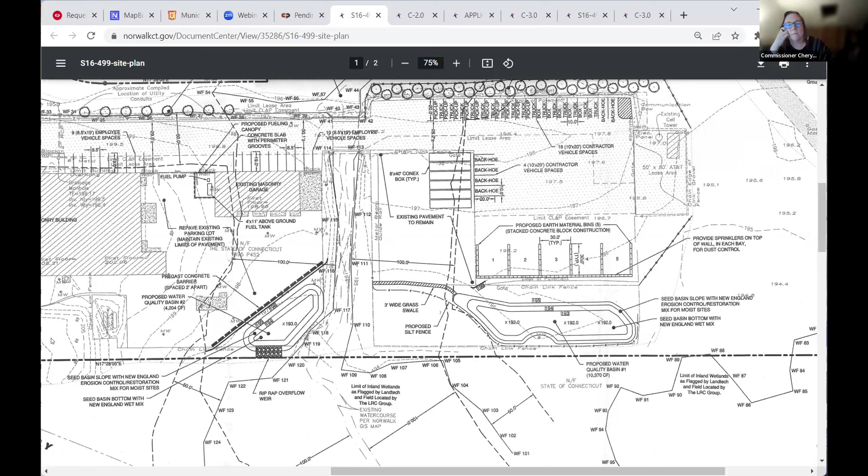Yes, well, right. That area was planted, just a proposal there, though. Well, that was in the approved plan, the 2016 plan. So whatever they can grow there that could provide a green buffer would be welcome. In line with the 2016 planting plan.

Sorry, I was just gonna ask before if we could see the 2016 one more time. Thank you. I couldn't find it. It's here somewhere, 2016. So this is what was originally approved. Didn't see that, I clicked on like five things. All right, just want to take one more look at this. Sorry. Appreciate it.

So in this plan, everything below where they have some bins and it says chain link fence right below the bins, was that all going to be green space? Right, so this chain link fence here, and this chain link fence here were existing. This is a proposed chain link fence. And then, you have to understand that this did not receive extended review in 2016. But yes, it seems to indicate that this was the silt fence or the limit of disturbance.

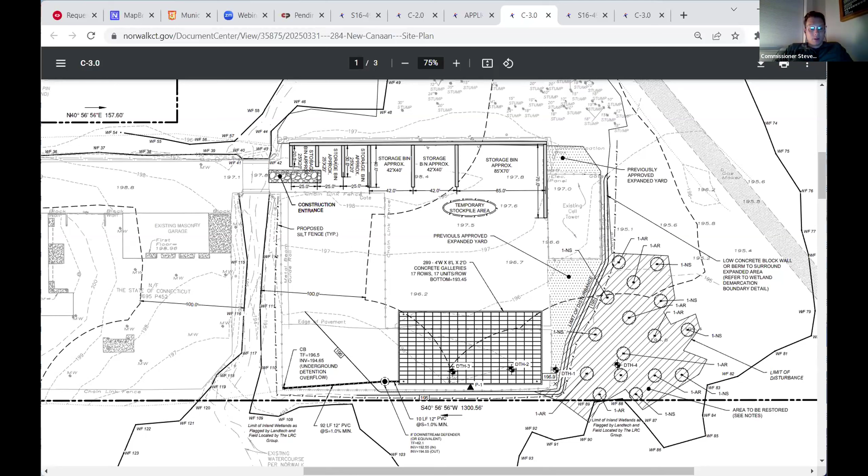No. I guess my view is, thank you very much for upgrading the water. It's the least you can do to remediate all the years you've been running off straight into the wetlands. But according to the 2016 plans, which were permitted, this is planted space and buffer. So if you want to make an application to not have it planted space per the 2016 plans, then by all means, put in an application. Okay. Well, to move this forward, that's what they're doing though, right? Putting in an application. Yeah, and we don't have to right now, we still have time. Or if someone wants to propose a motion one way or another, you're welcome to.

I'm sorry, to what Catherine was saying, and what was discussed before about adding a planted buffer, could we include a requirement in the resolution that a portion of the Cultec system be a maintained natural space with native seeding over it? Could we require that and have a good amount of space similar to the green space that would have been provided before with the stormwater management basin? And would anybody feel more comfortable with it that way? So let's say splitting the 50 foot in half: give us 25 feet of vegetated buffer from the property line to the edge of proposed concrete.

And I'd be fine with that. And so what'll happen is, I'm sorry, other commissioners want to chime in, but I want to talk about the consequences of doing that. I mean, I think that's in line with what was in the approved plan. So to say that, oh, well, we want to pave it over, that wasn't what was in the approved plan. Okay.

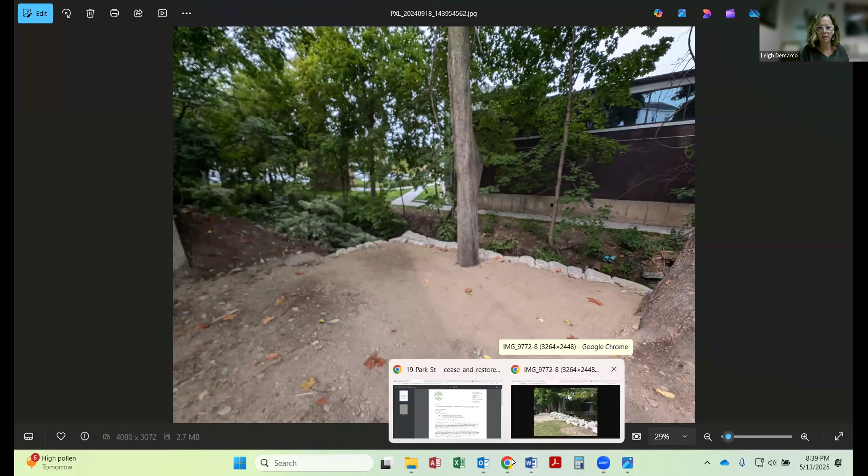So we're talking about V 25-1081, 19 Park Street. Hi, yes. Hi, I'm Leigh DeMarco. I'm land use technician. I'm gonna share my screen. And while Leigh is prepping to share a screen, I know that Attorney Dolberg has done show cause hearings, but I'll just clarify that when the agency staff issues an order, the agency has to hold a show cause hearing within 10 days of issuance

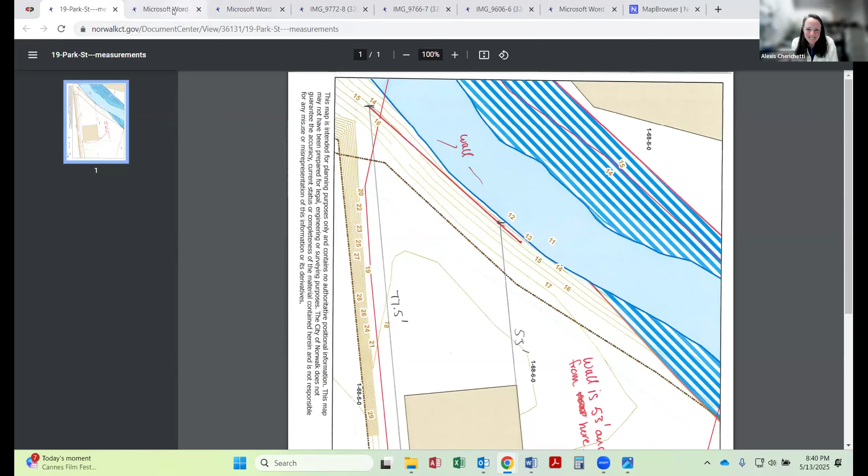of the order. And the purpose of tonight's show cause hearing is to allow the respondent to show cause and present any testimony as far as why they feel there is not a wetland violation. Following the show cause hearing, the agency will make the determination whether to modify and uphold, or withdraw the order. And so the process that we'll use is Ms. DeMarco will explain why the enforcement order was issued. And then we'll turn it over to the respondent's representative and then move forward. Go for it, Leigh. You're sharing your screen very nicely.

Thank you, Alexis. Just a little background here. 19 Park Street is located here, just north. This is the town green down here. City Hall is down farther south on East Avenue. For reference, this is the Italian Corner Deli. And this is the new revamped Hartford Healthcare building, previously Lillian August, a couple years ago, if that helps anybody orient themselves. The lot is developed with a multifamily building and a storage building in the rear.

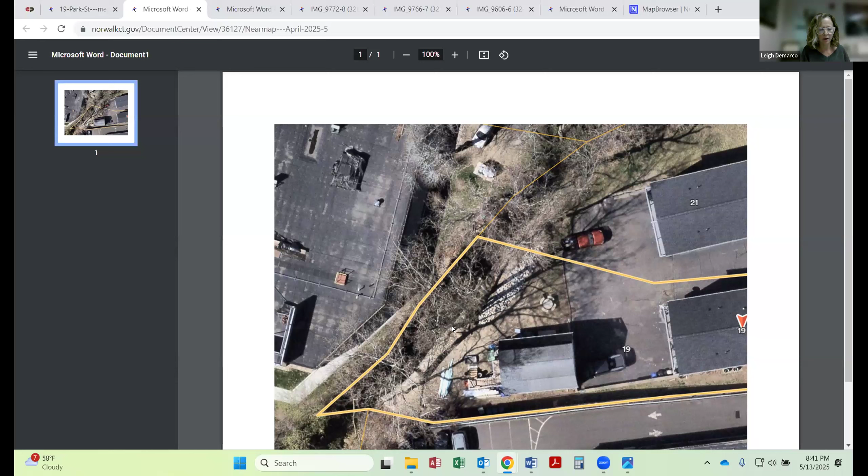And then on the western property line along here is Pond Brook, runs from north to south along here. It's a tributary of the Norwalk River. And so it runs that way and it empties into the Norwalk River farther to the south down here. Zooming back in a little bit. Riparian wetlands occur along the lower areas, right adjacent to the brook, with larger trees and within the embankment.